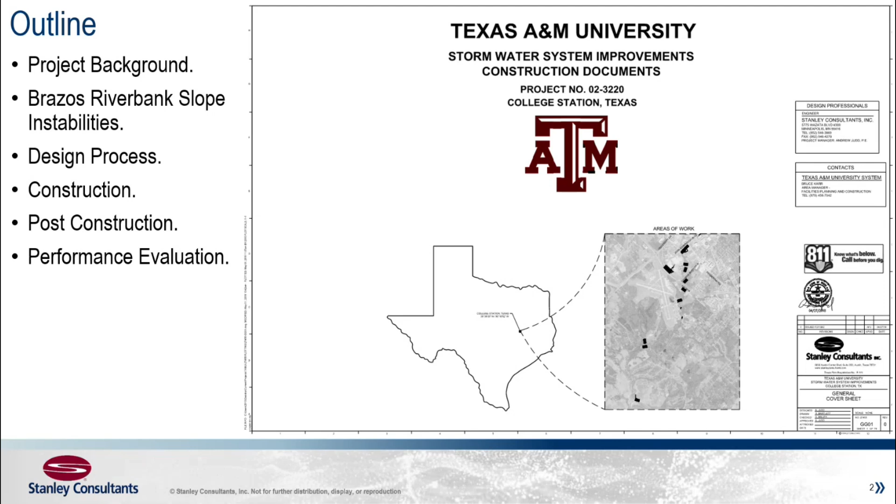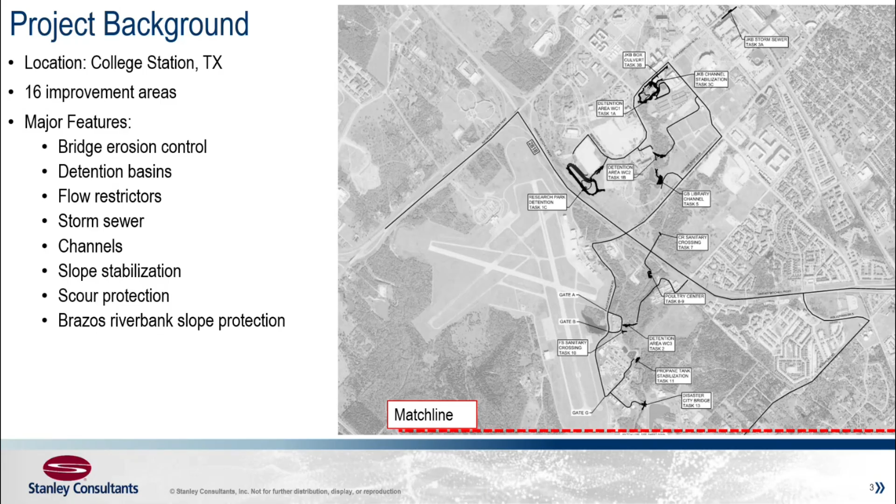This project was kind of an overall storm system reboot for Texas A&M. They didn't really have any good stormwater infrastructure, so whenever a large rain event occurred, it was kind of just uncontrolled. So we did detention basins, flow restrictors, stream channel protection, stormwater pipes, and part of it was also doing the Brazos Riverbank slope protection, which will show up on the next slide here. So that's along the Brazos River.

Next to White Creek is the creek that comes up from the Brazos toward the campus. And then this is the main Brazos River that's pretty far away from the campus, but they do have a wastewater treatment outfall from the campus that's in this area, so that's why it is related.

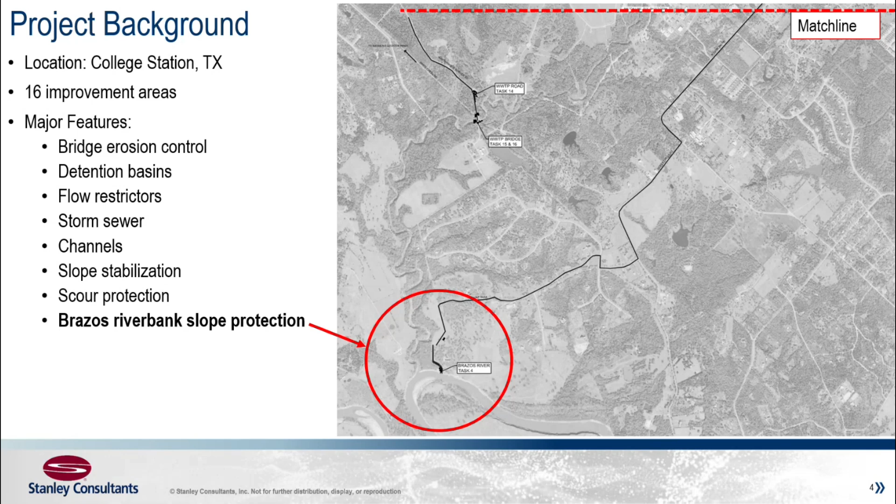These are some post-construction photos of the other features for the project. The leftmost being the detention basin and the flow restrictors that we designed and installed. Then on the right we have the channel stabilization and scour protection, and then some stormwater piping and features.

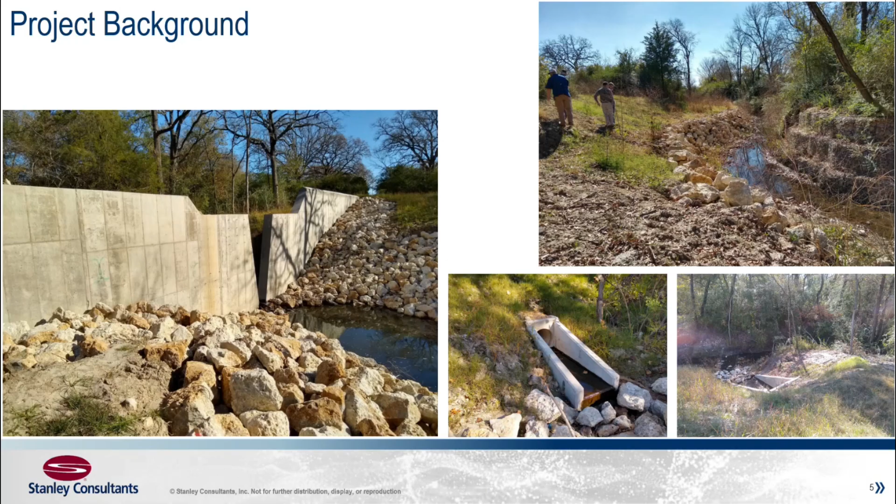The main feature for today, though, is they were having slope stability issues along the Brazos River that were approaching this house. You might be saying, okay, it's a house, why is that related to Texas A&M? They are a major donor from the university, and their wastewater treatment pipe does come out right here, so the university kind of wanted to show support or do something for this homeowner, since they're such a big donor to the university.

Common in this area along the riverbank with these soils, high flood events occur, and then they take out these sections of soil in these U-shapes, and these tend to start slowly. You can kind of see it here along this riverbank where it's starting to fail, and then further downstream, more away from the house, there's this large slough that occurred around 2000.

This is an aerial image from 2014. But then in 2015, they had another large failure that occurred in closer proximity to the house, within 100 feet, and that also took out their wastewater treatment outfall pipe. It's a little hard to see, but you can see the pieces of the pipe laying in this failed soil area.

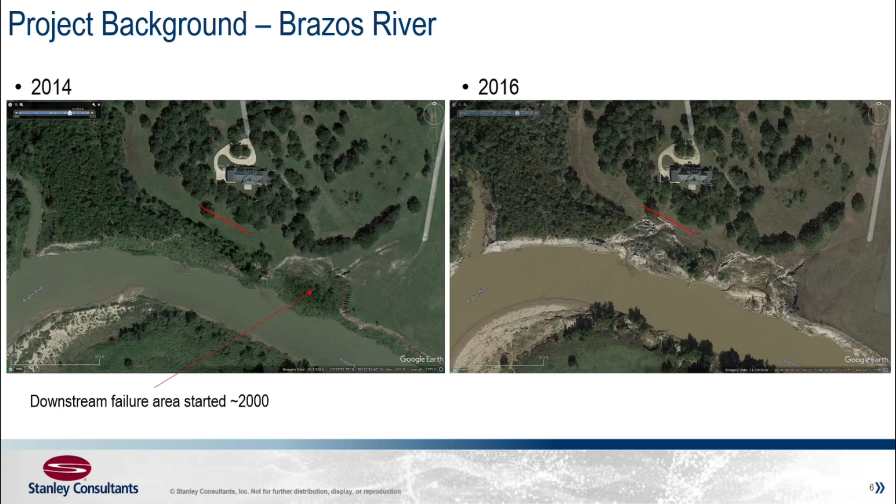So we got contracted by Texas A&M to go out there, do an evaluation, come up with a design, and ultimately have it bid for construction, with a set of drawings to fix the problem.

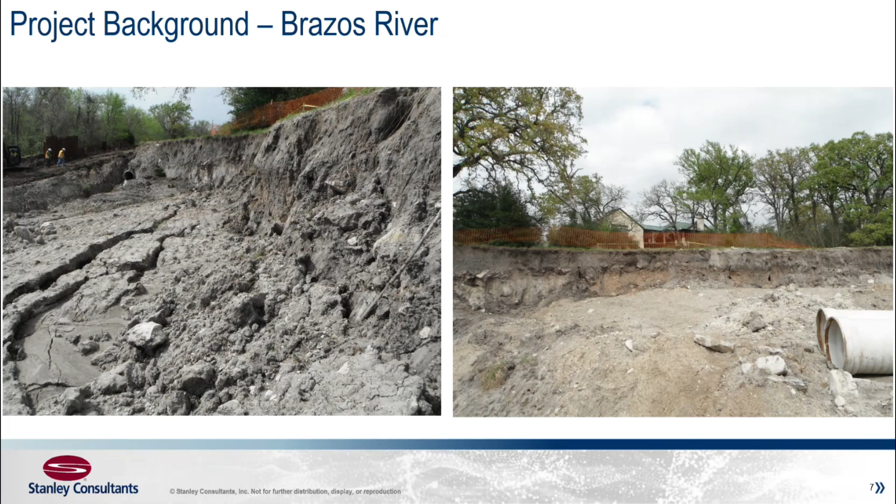So this failure surface is about 10 feet, and you can see how close it is to this house and how it is continuing to move, shown by the cracks in the surface of the slough soil. So it is an unstable area that's not stable after it's failed. We were expecting it to progress up to 60 feet more, or more.

So we went through the whole project design process, from being contracted to doing subcontracts with Braun, with Jensen, I believe, to do the topo surveying.

Then we did a residual strength analysis of that slough soil, determining its shear strength parameters, so we could come up with a global stability model for a solution.

Then we had an alternatives analysis, evaluating all the potential options from doing nothing to cutting back the slope or doing something more substantial with a retaining wall.

And then from there, we did contract drawings, a contractor performance spec to design the wall. Hayward Baker ended up designing the wall.

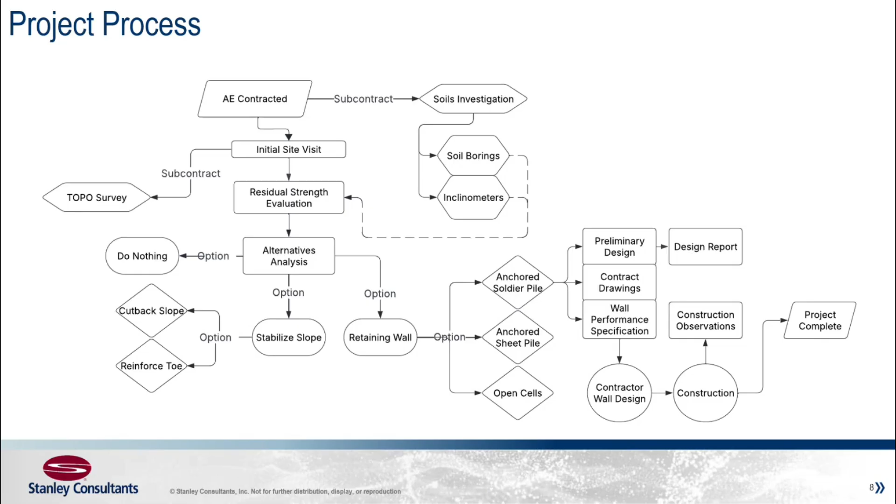Construction, we had some construction observation site visits, and then ultimately the project was completed in 2018, I believe. So it's been performing for 7 years, so we'll eventually also look at its performance.

We subcontracted Braun to do some soil borings both above the failure plane and within the failed soils.

In this region, the Brazos River can flood frequently and suddenly, which leads to erosion problems with these fat clays and sandy clay soils, ultimately leading to these failure surfaces.

Also, to get an understanding of how the failure is still moving, we installed 2 inclinometers, which just read the lateral displacement over a vertical distance.

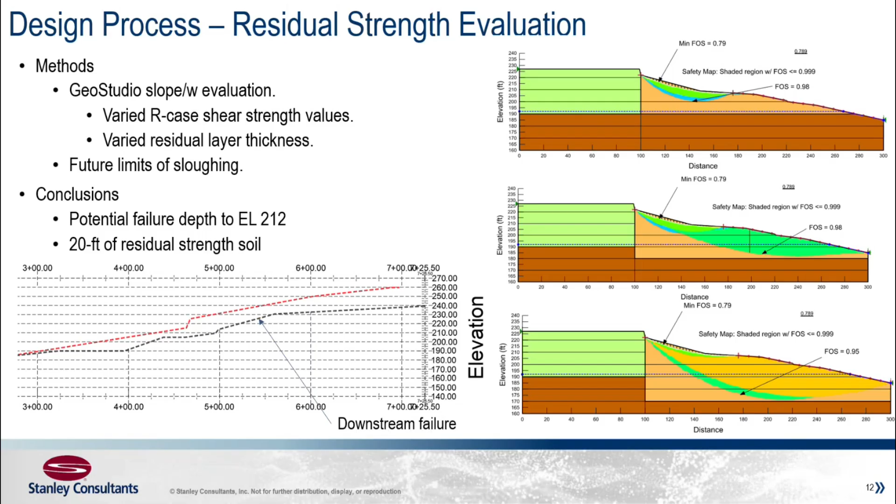After determining the design parameters we could use, we started coming up with a few alternative options.

The first one, as always, is to do nothing. It's not really the university's structure, so that is an option, but because they're a big donor, they wanted to do something to protect both that structure and their wastewater treatment pipe that comes in from the side and goes out in that failure area. So do nothing wasn't an option they wanted to pursue.

We also looked at stabilizing the slope either through cutting back the vertical failure surface or installing pile reinforcing to reinforce the slope at the toe. The pile reinforcing didn't really make it very far, as we deemed it too expensive and too difficult to install piles strong enough to retain such a large failure right off the river.

This cutback slope option was also eliminated, mainly because we were expecting the 60 feet we would need to cut back to get a 3-to-1 slope beyond the failure point, which would take out all of their trees and change the landowner's property. So the university didn't want to pursue that as an option.

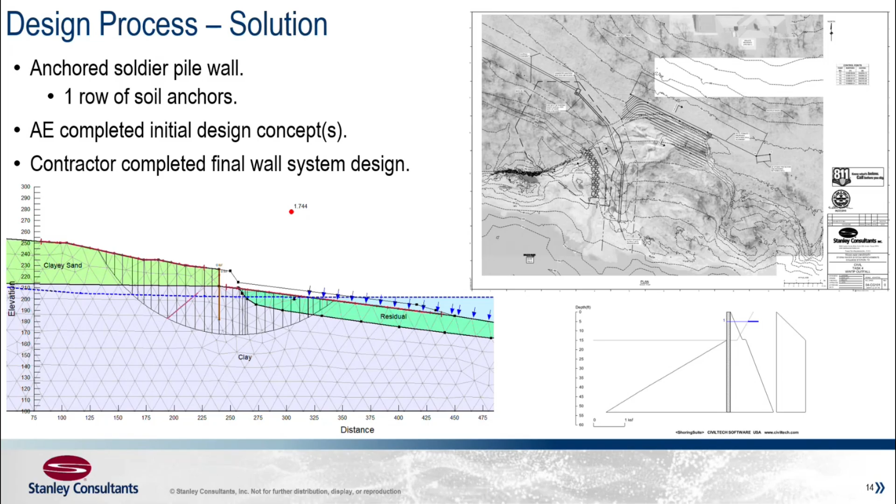The wall was ultimately bid as a contractor option, and Hayward Baker was the one the prime contractor subbed to complete what ultimately was decided to be a soldier pile retaining wall. There was a little back and forth between this and the anchored sheet pile wall, but given the exposed face in our plan for the wall alignment, they ultimately agreed that a soldier pile wall was their best option.

So they completed this wall design that has a 25-foot unbonded tieback with a 35-foot bonded tieback, all in soil, so it's a pure soil tieback, nothing going into rock. I added this blue line being the soil wedge to show the unbonded length being extended beyond the soil wedge.

This design elevation shows 212 here, and then the existing and proposed grades showing where we're putting the wall in relation to that 10-foot sloughed soil face. So we did move the wall back a little bit to get it away from this failure plane. This red line, which I'll address later, is where the ground is currently.

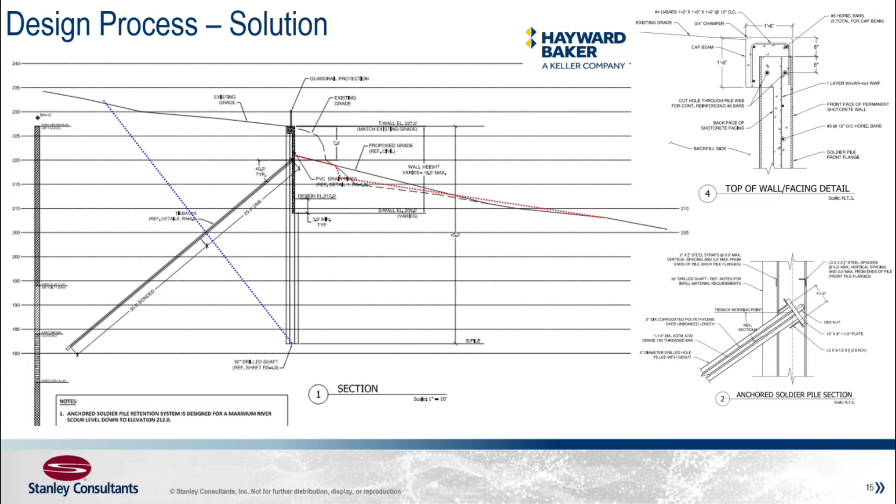So this is in the middle of construction. They have all of these soldier piles driven, encased in concrete. Then they have the first layer or lift of the concrete facing, the tie rods and tie backs installed with their nuts, and a drainage system behind the wall with the drains going through the wall. This shows the rebar going through those C channels I mentioned, with the tie back in the middle of the C channel. On this day, they were proof testing one of the anchors. These were 57 kip anchors that we tested to 150%, every anchor I believe.

This photo on the top right is the pile cap or wall cap before the handrails were installed. This one on the right is their excavation to gain access for installing that concrete facing down far enough to reach that 212 elevation. Everything on the right in these photos is the failed soil surface that they cut back for access and to clean it up.

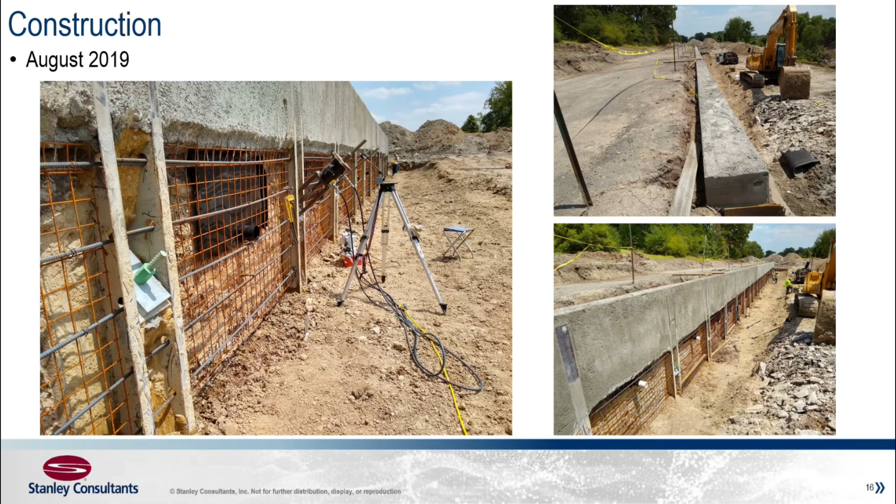This is relatively post-construction. You can see the wall is all in. We redid the grading up to those drains. Just for reference, those drains are right about at those anchors, so there's like 7-8 feet below these anchors to the bottom of that concrete facing. This shows the railing, the wall, the soil grading, and how it transitions to either side where the wall tapers out.

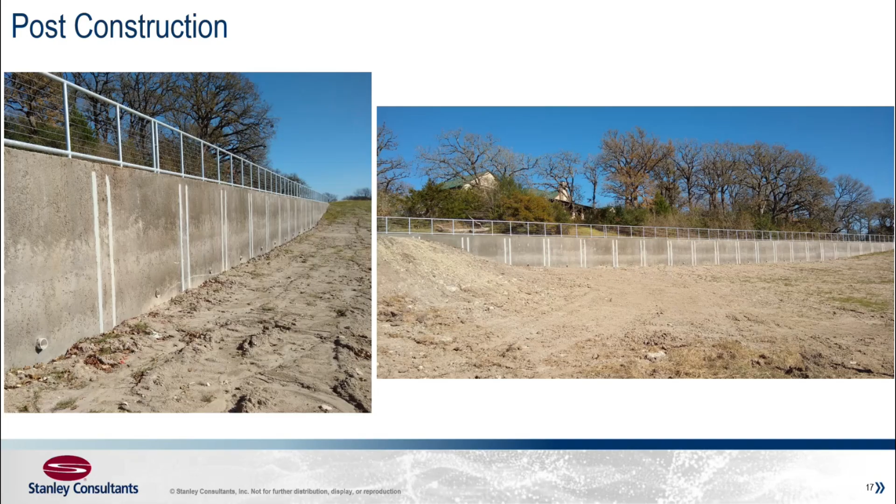That was 2.5 years after construction. This is recently, 6 years after construction. It's a little hard to see, but you can make out the same failure plane coming across here. But now everything is heavily vegetated, so it doesn't seem to be moving very much—the vegetation is able to grow. Behind the wall, there's been really no change at all. So our wall does appear to be doing what we designed it to do.

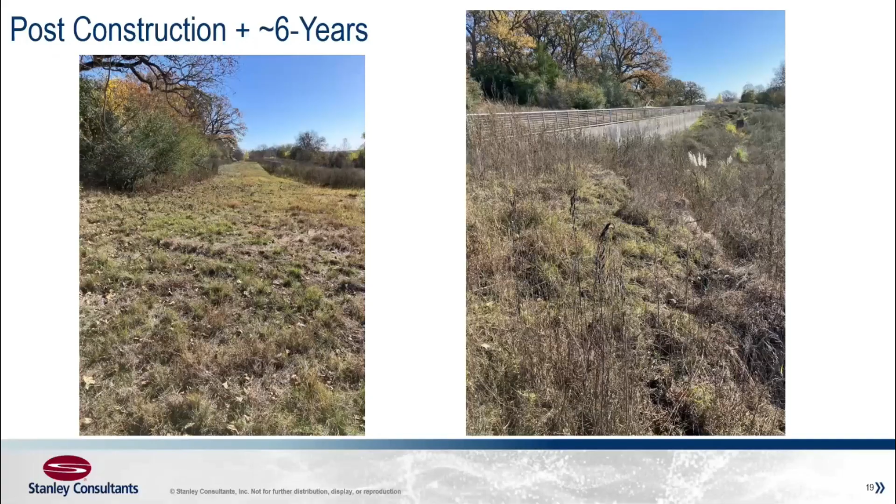Two questions. What development limits did you guys give to the homeowner and the water treatment plant, building a wall right up against the backyard? Did they have, like, restrictions that you can't excavate more than 5 feet of soil? Was there anything given to the client and homeowner about development limits? That wasn't particularly discussed. Their main concern was, like, if they wanted to put a swimming pool in the backyard and dug a 10-foot hole, that would remove the factor of safety, which is a good point, but that wasn't discussed. What they're primarily worried about is more our impacts to them.

I was trying to find a photo of it. It's right here. There's a tree right along, very close to that failure plane, with more trees behind it further back. So it was a discussion point, whether there was a way we could save that tree, which eventually was no, since its root ball is exposed, right there. We said the tree's got to go. But as for restrictions on the homeowner to change anything in their yard, that wasn't discussed with them at the time.

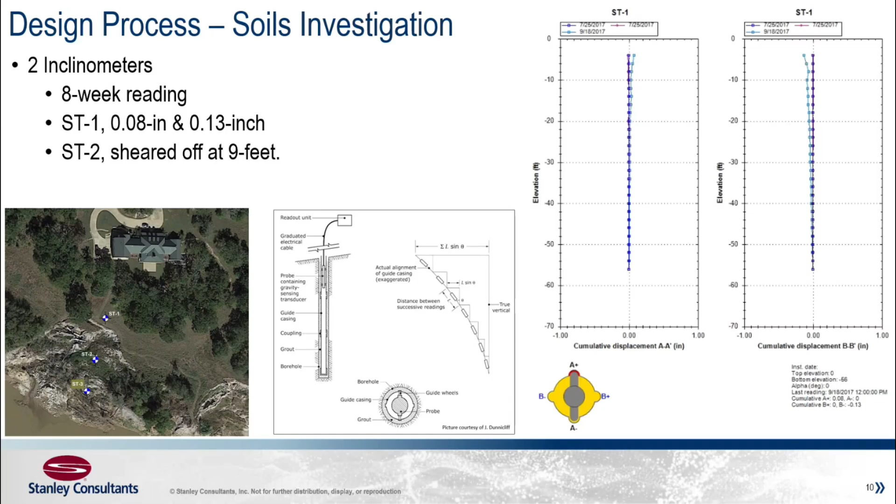And a sister question to that was, is the service life on your wall shorter because the flooding events are so uncertain, they happen much more often? You couldn't say this is a 100-year wall just because of how often the river floods? Yes, there is a little uncertainty with whether, 15 years from now, these two failure planes are going to connect. That's why we tried to have this little wing here to prevent it from creeping around, but yeah, it's not a 100-year design life. Maybe a little easier question: if this was a retaining wall in a place that didn't flood, just holding soil back, would this be half the life of that one? That was never something flooding?

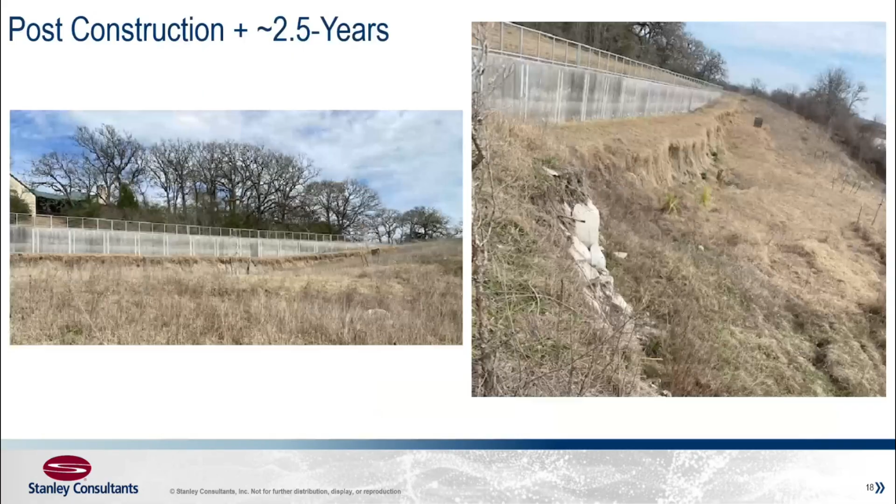So there's two planes there, and you talked about them maybe merging. Are you still observing the second one too, or will you see it progress further back? Yeah, it has moved a little bit. It's a little hard to see, but this one is longer in its distance between the river and its back than this one was in 2016. But it has not moved significantly beyond that. There's also a row of trees right there that could be holding it back. Between that and as another larger flood event occurred to make additional failures happen, it seems to be a little bit, and then a larger event occurs and takes out a lot.

Further downstream, there is a community pretty close to the riverbank, and they had to fill in a bunch in the river to stop their houses from being taken out from a similar thing — a little bit, and then one year a larger flood occurs, takes out almost right to their houses. I don't know who filled it in, but in the aerial imagery you can see that somebody came in and filled in the riverbank to protect them.

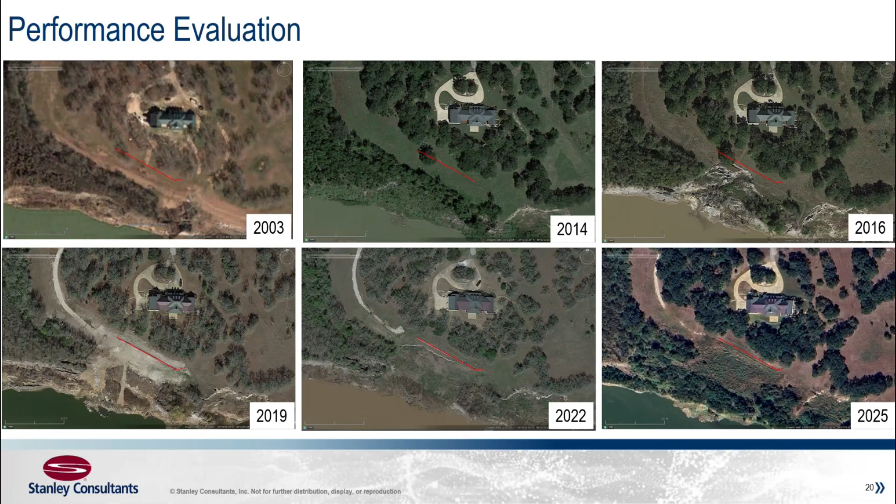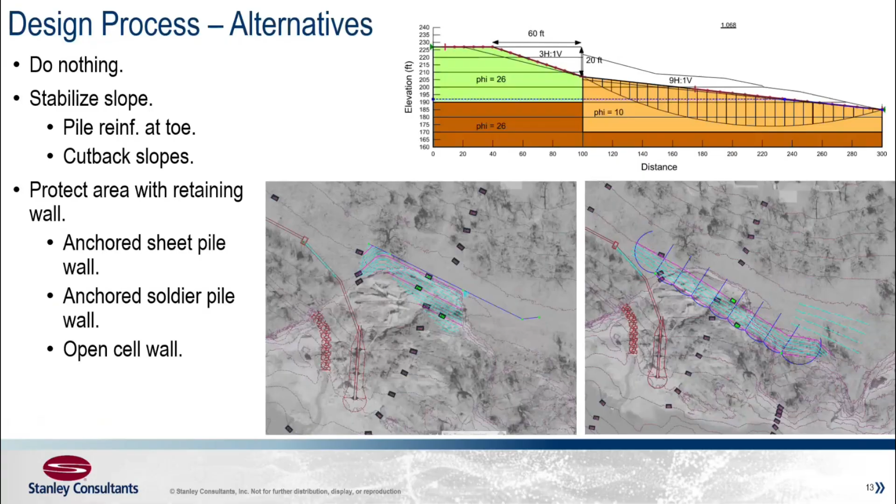So you mentioned you're currently looking at a wastewater pipe going along that's outside the scope of this, but it's sort of related — one of the other places is cutting through a wastewater pipe, and you're going to have to address that. I'm assuming the main concern there is if it's far enough for the wastewater pipe to break. Yeah, so it's the same thing that happened originally where the pipe was coming across the face of the wall and exited down here. When this failed, it took out the middle of the pipe. This blue is a temporary thing the university just put in for an emergency situation. In our contract, in design plans, we relocated it and attempted to stabilize it with some riprap, which isn't an ideal way to stabilize it in moving soil. So it has separated a little bit down here at one of the collars between the pipes. That's outside this specific thing, but it's going to be a larger thing we try to tackle with the university.